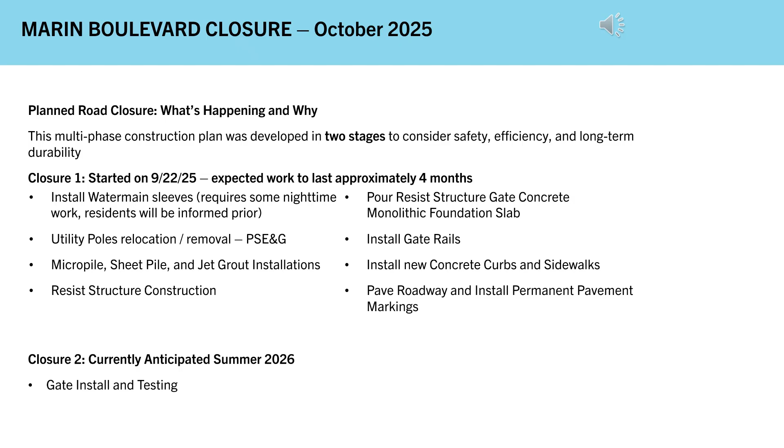Here is a summary of the construction activities currently underway in Jersey City. In Marin Boulevard, we are installing utility conduits for both PSE&G and Verizon. This involves coordinating placement and depth to meet each service provider's requirements and align with site inspections.

Deep foundation supports are being installed to reinforce the resist alignment. These micropiles will ensure long-term structural stability. Please refer to the previous slide for more in-depth information about this closure.

In Marin Boulevard, beneath overhead rail lines, rails are being placed and a concrete topping slab is poured to support future track infrastructure. In Jersey Avenue, west of roadway, excavated areas are being restored by replacing and compacting soil to meet grade and stability requirements, and structural elements are being formed and poured, continuing our progress on foundational components.

In 18th Street, east of Marin Boulevard, jet grouting operations are underway to stabilize the ground and improve soil integrity in preparation for future construction.

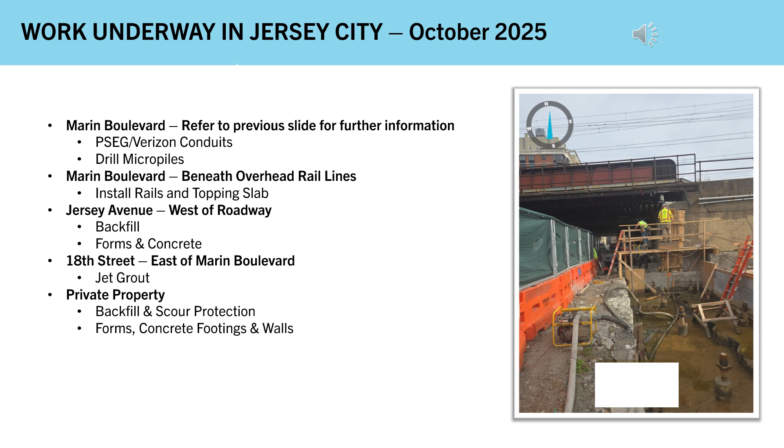On private property, we are backfilling and reinforcing targeted areas to prevent erosion and ensure long-term durability. Formwork is being set up and concrete poured for footings, walls, and other structural elements. Alignment and reinforcement are carefully monitored throughout.

Here is a summary of the construction activities currently underway in Hoboken and Harborside Park. At New Jersey Transit, we're excavating, forming, and pouring concrete for curbs and sidewalks to establish roadway edges and safe pedestrian paths.

In Bloomfield Street, between 14th and 15th Streets, existing drainage infrastructure is being removed and rerouted to support the new site layout and maintain proper water flow.

PSE&G gas lines are being safely disconnected and sealed to prepare for utility relocation and excavation, and deep foundation supports are being installed to reinforce the resist alignment.

In Harborside Park, a base slab is being placed, formwork is being set, rail components are being installed, and concrete is being poured for structural support. Gate components are being positioned and secured for proper alignment and integration with fencing and access systems.

Formwork is being set and concrete poured for the retaining wall. Drainage systems are being installed to manage water flow and protect structural elements along the west wall B.

Fill material is being placed and compacted to restore and stabilize park areas, and under-drain systems are being installed to manage subsurface water and protect foundations.

In 15th Street, final relocation of PSE&G gas lines is underway, ensuring compliance with utility standards and maintaining service continuity. This will be overnight work, and residents will be informed prior. Please refer to the next slide for further information.

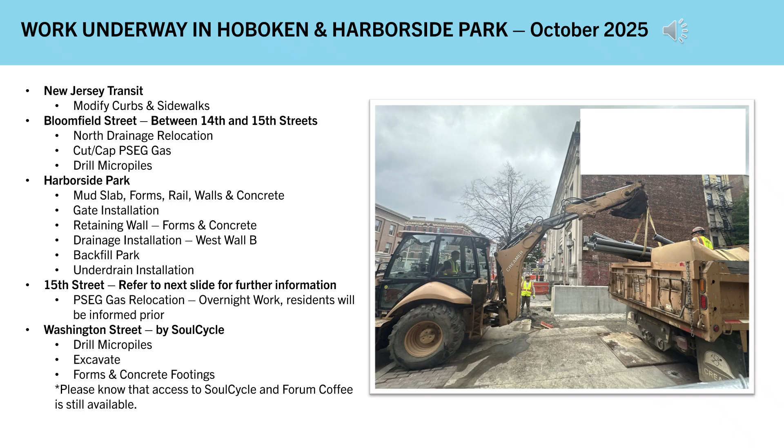In Washington Street by SoulCycle, foundation supports are being installed for the resist alignment. Soil and existing materials are being removed to prepare the site for utilities and structural elements, and formwork is being set and concrete poured for footings and other structural components. Please note that access to SoulCycle and Forum Coffee is still available.

15th Street closure: what's happening on 15th Street and why? This construction project is being done in three phases to make sure it's safe, efficient, and built to last.

Phase 1 is already completed. This closure was completed between mid-October 2024 and January 30th, 2025. It took about 4.5 months and included underground investigations, moving utilities, installing support structures, and setting up drainage systems.

Phase 2 is happening now. It started on July 7th. 15th Street reopened early to vehicle traffic on August 29th, 2025. Work will continue in the surrounding areas outside of the roadway.

Expected work includes continuing work on the foundation outside of the roadway, ongoing coordination with utility companies, and preparing for the gate delivery. A full reclosure will be necessary in the future to complete utility relocations, as well as complete the remaining portions of the foundation of the resist structure and gate rail embeds. We will notify the public in advance of the full closure.

Phase 3 is to be scheduled and will focus on final touches, restoring the area, and adding amenities. If you'd like more details, please check out the video from our public virtual meeting on our website.

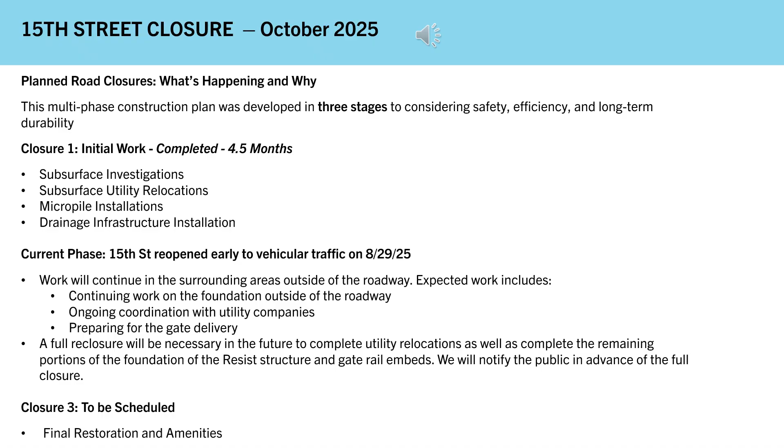Southern Alignment Construction Update. Construction along the Southern Alignment is ongoing, with completion expected by summer 2027. Work will generally move in sequence along the route, though unexpected conditions may cause temporary pauses, and crews may shift locations to maintain progress.

Updated construction timeline by area. Within the top image, Grove Street, orange section, spring 2026 until summer 2026. At NJT, green section, left side early 2025 until spring 2026, and right side early 2024 until end of 2025. On the lower image, Washington Street, blue section, summer 2024 to end of 2025. Observer Highway and Washington Street, blue section, early 2026 to spring 2026. Observer Highway, orange section, early 2026 to summer 2026.

Please note that the bike lane within Observer Highway, as well as the pedestrian walkway and parking on the south side of Observer, will be closed starting the week of July 14th for the next 6 months. Bikers and pedestrians will be diverted to the north side of Observer Highway, starting at Willow Street, to a temporary bike lane and the existing sidewalk.

At NJ Transit Yard, green section, summer 2024 until spring 2026. Marin Boulevard, yellow section, initial phase fall 2024 to early 2026, with full closure anticipated around September 22nd, 2025, lasting approximately 4 months. 18th Street, pink section, late 2024 until fall 2026. Jersey Avenue closure, April to July 4th, 2025, with future work to be determined.

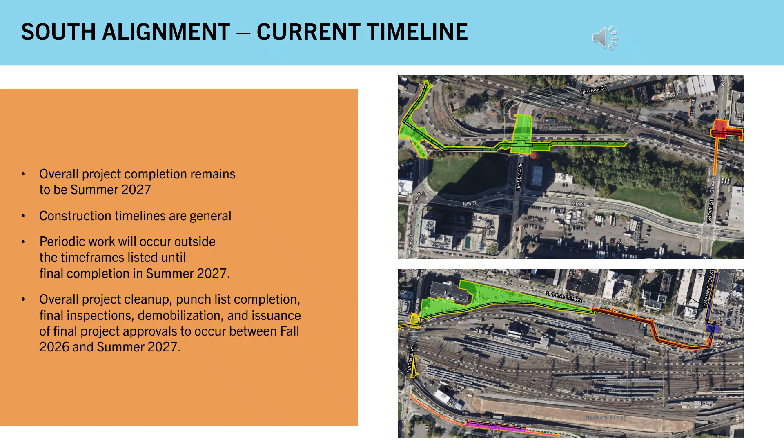Some work may occur outside these windows to address site-specific needs. A final phase of inspections and approvals will follow before project closeout in summer 2027.

Northern Alignment Construction Update. Work continues along the Northern Alignment with overall completion still expected by summer 2027. Construction will generally move in sequence, though unexpected conditions may cause temporary pauses, and crews may shift location to stay on schedule. Some work may also occur outside planned timeframes. As the project nears completion, a final phase will include inspections, demobilization, and approvals.

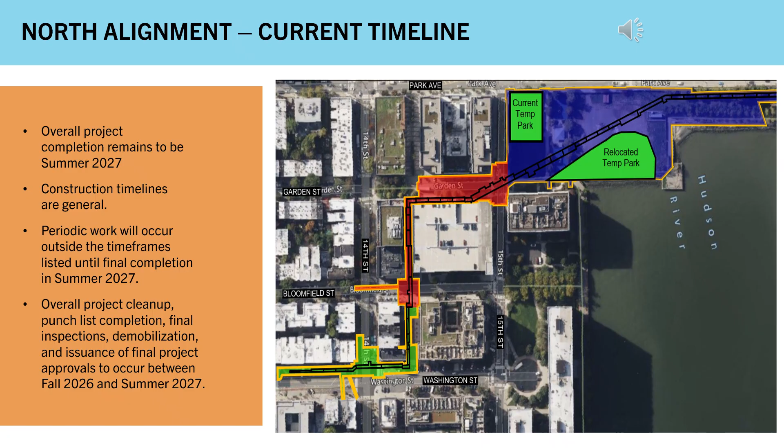15th Street, in orange, was fully closed since early July but reopened to vehicular traffic on August 29, 2025. Work will continue in the surrounding areas outside of the roadway.

Quality of life impacts are and will continue to be tracked. The construction work will be performed within the permissible noise and vibration limits, which are and will continue to be constantly and consistently tracked.

The contractor will be implementing their submitted, approved plans for noise, dust, and vibration control and tracking. In the event that noise, vibration, and dust levels exceed acceptable limits, the contractor will advise the construction manager immediately, and appropriate action will be taken. The DEP continues to coordinate with the resist construction contractor to ensure compliance with all dust control requirements that meet state regulations in the contract.

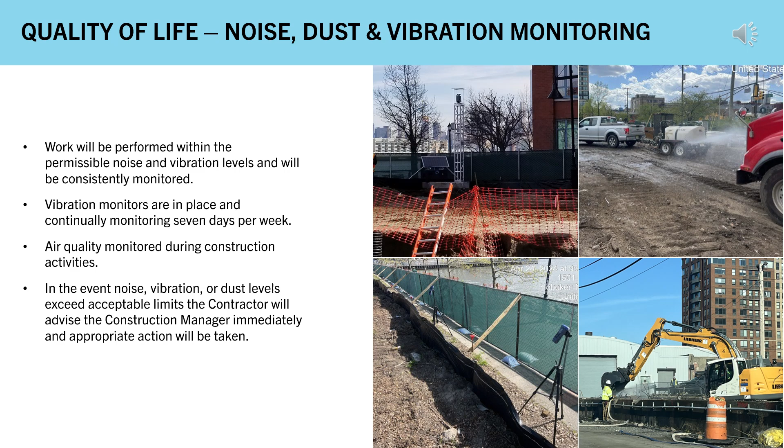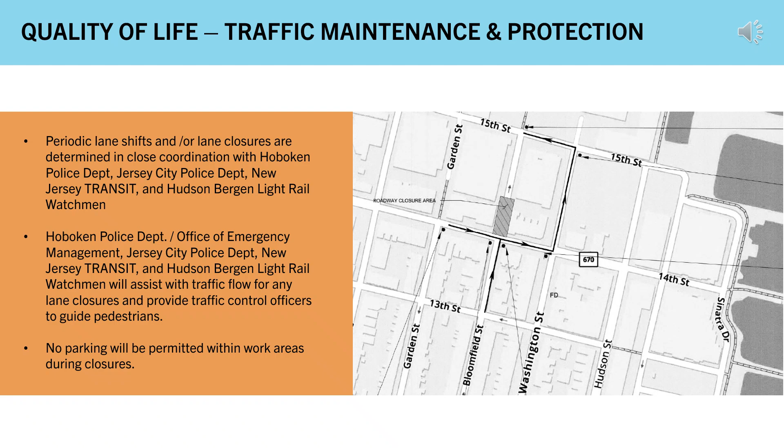Traffic maintenance and protection will be ongoing through the project. Periodic lane shifts and/or lane closures are determined in close coordination with Hoboken Police Department, the Jersey City Police Department, New Jersey Transit, and Hudson Bergen Light Rail Watchmen. These agencies will also assist with traffic flow for any lane closures and provide traffic control officers to guide pedestrians. No parking will be permitted within work areas during closures.